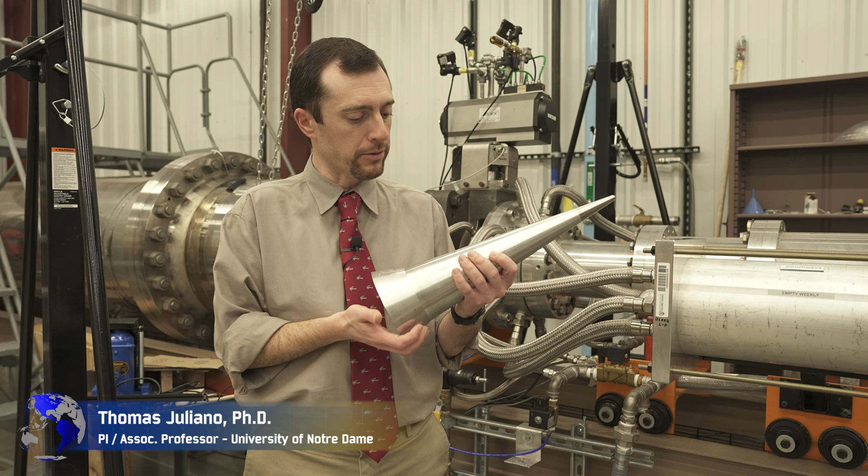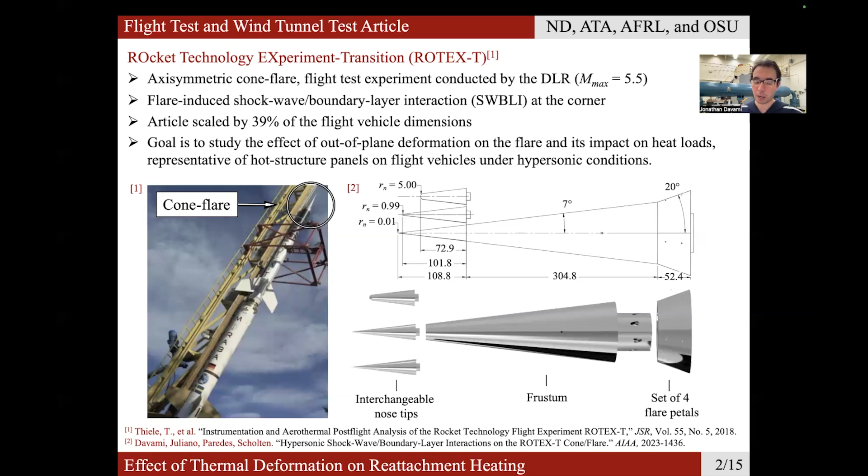First increment of the AFRL Hub project was to first perform computations and compute a thermal deformation field. Then we would superimpose the deformation field onto the flare and fabricate a deformed flare so that we could experiment with it in the Notre Dame Mach 6 Large Quiet Tunnel. We tested the model in the AFOSR-Notre Dame Large Mach 6 Quiet Tunnel.

For the experimental setup and instrumentation, we collected simultaneous surface and off-wall measurements. We collected infrared thermography. We had 4 PCB pressure transducers mounted on the conical forebody to align the model with the free stream flow. For off-wall measurements, we collected simultaneous high-resolution background oriented schlieren and high-speed background oriented schlieren.

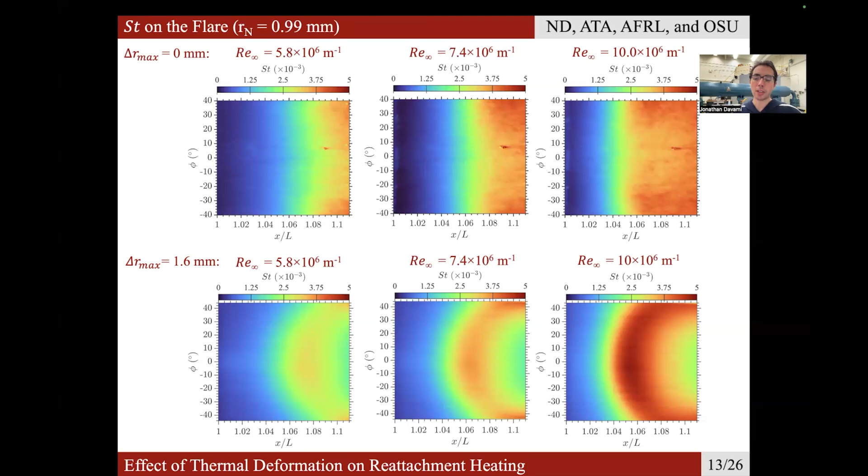This slide here compares heating distributions for the conical flare on the top row and the deformed flare on the bottom row. We can clearly see by comparing the conical heating to the deformed heating that the heating distribution is no longer axisymmetric, and the peak heating magnitude is different as well.

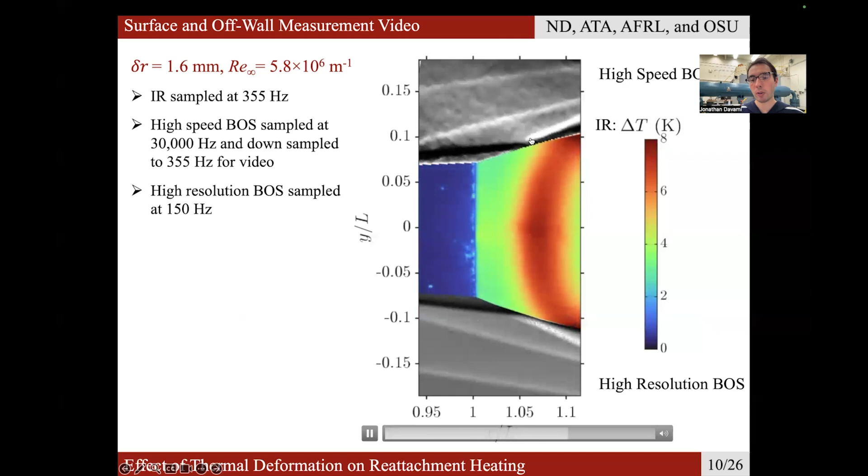This slide here superimposes the off-wall measurements with the surface heating measurements. From the off-wall measurements, we can see the bow shock, we can see the separation shock wave, we can see the reattachment shock wave here at the flare, and most interestingly, we can see where reattachment is. Downstream of that point, we have the higher aerothermodynamic heating characteristic of the shockwave boundary layer interaction. Such deformations have occurred previously on high-speed vehicles such as the Valkyrie seen behind me.

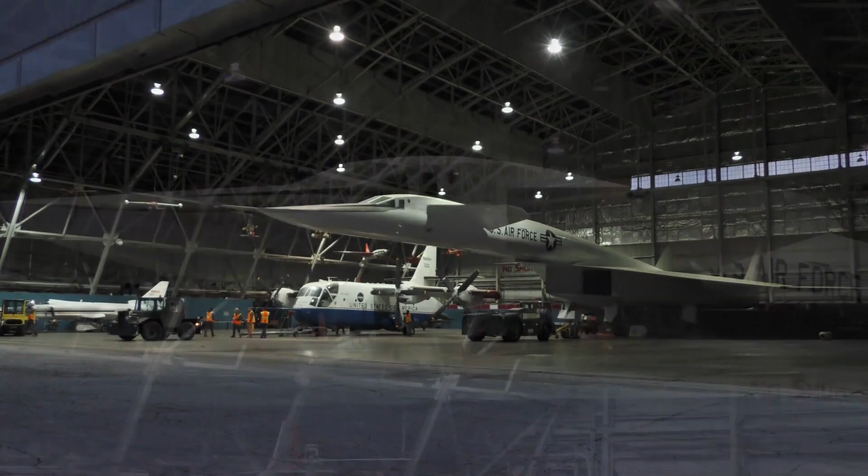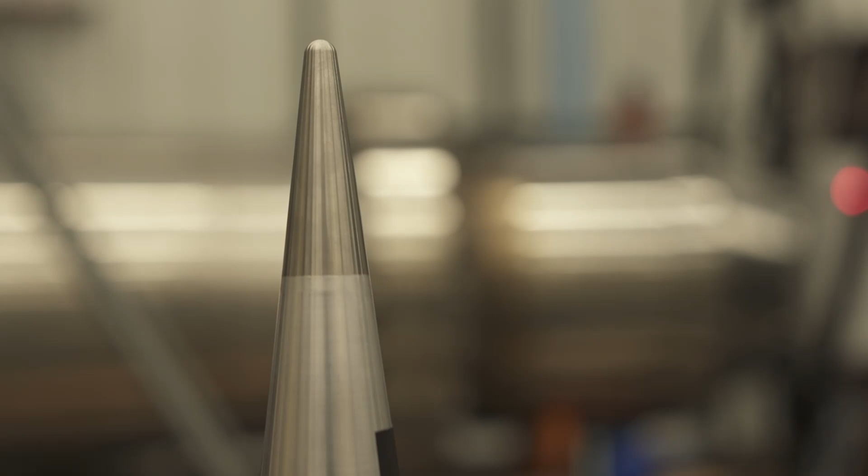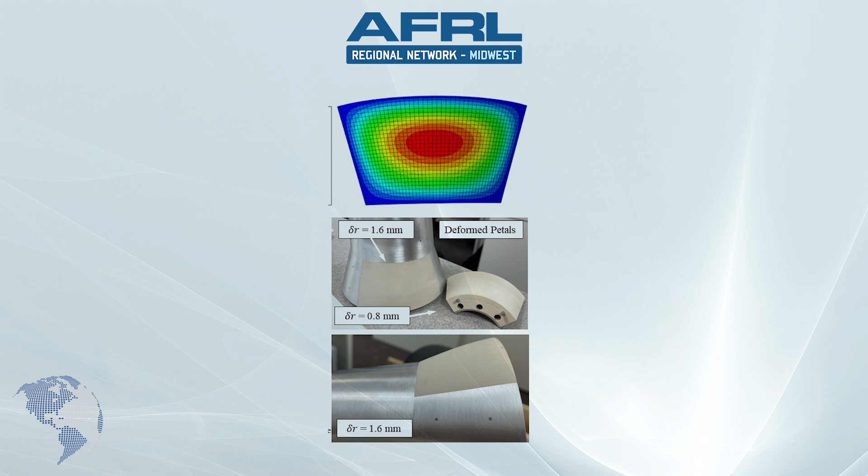As part of this research program, we conducted an experiment at the AFRL Mach 6 Ludwieg tube. This experimental campaign allowed us to use the same ROTEX-T model that was tested at Notre Dame previously to collect data at a facility with a different free stream noise environment. Similar to the tests that were conducted at Notre Dame, IR thermography was taken of the cone and the deformed petal of the flare. This diagnostic allows for measurements of heat flux in the regions that were imaged, letting us directly compare the results from the 2 different facilities.

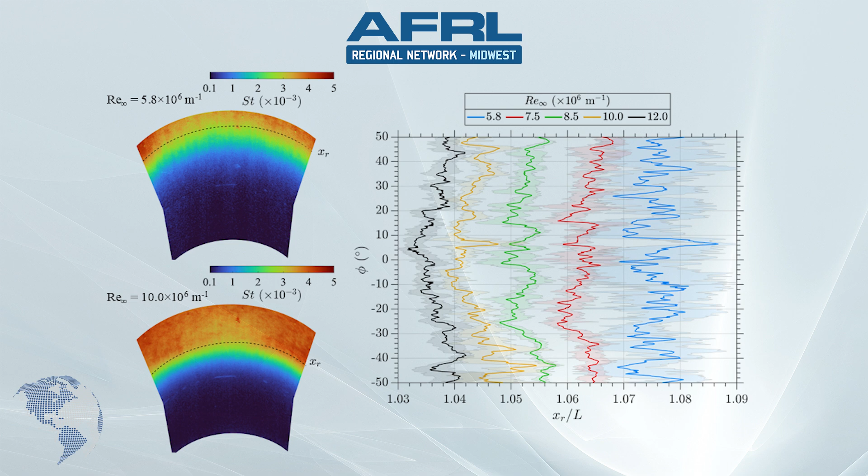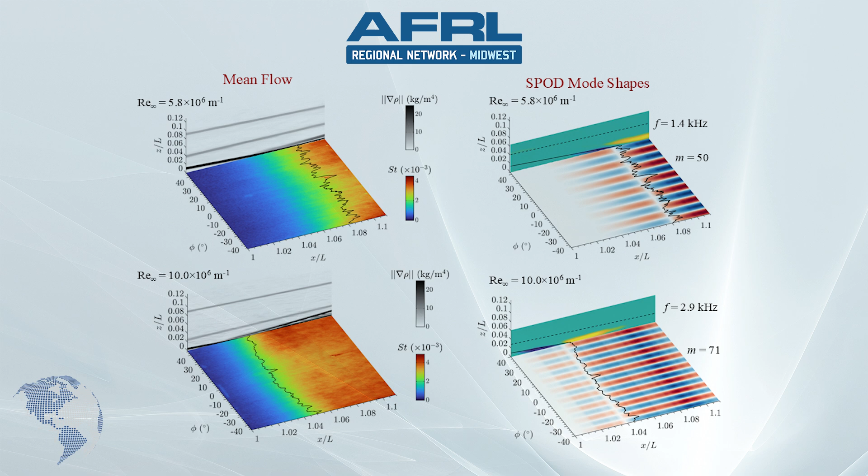In addition to IR thermography, high-speed self-aligned focusing schlieren, or SAFS, was taken at AFRL. It allows for density gradient measurements to be made across a narrow depth of focus, avoiding the large integration distances that occur for traditional Z-type schlieren. However, it was a difficult technique to implement due to the high sensitivity of the diagnostic to vibrations and the challenge in aligning it.

Preliminary results from this experiment support the conclusions made from the Notre Dame tests, showing that the deformation along the flare appears to pin reattachment. SPOD analysis of the schlieren also shows there does not appear to be significant changes in the instabilities present for the different deformation heights.

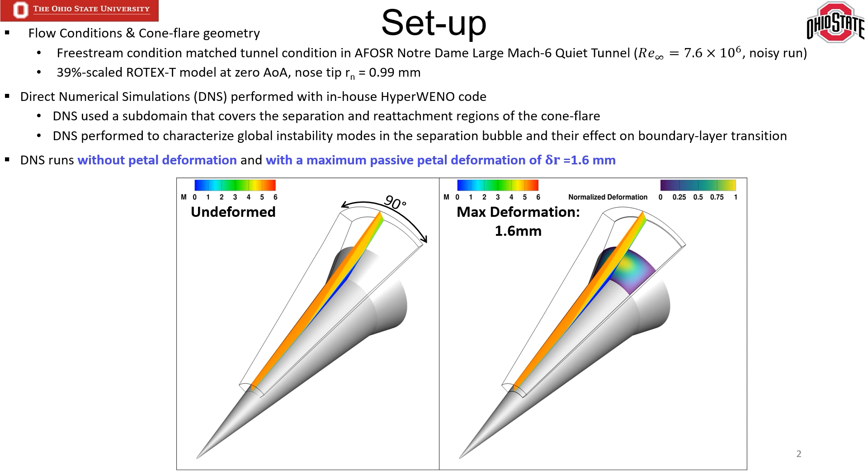Hi, my name is Nolan Little, and I work in the Computational Aerodynamics and Flow Physics Lab here at Ohio State under Dr. Dewan. And we took a computational approach to studying how the surface deformation on the ROTEX-T cone flare affects reattachment heating. So we did 2 direct numerical simulations here, one with an undeformed flare and one with a max deformation of 1.6 millimeters, which corresponds to the more deformed of the 2 petals used in experiments. And both of these domains span a full 90 degrees, which covers a whole petal that would have been used in the experiment.

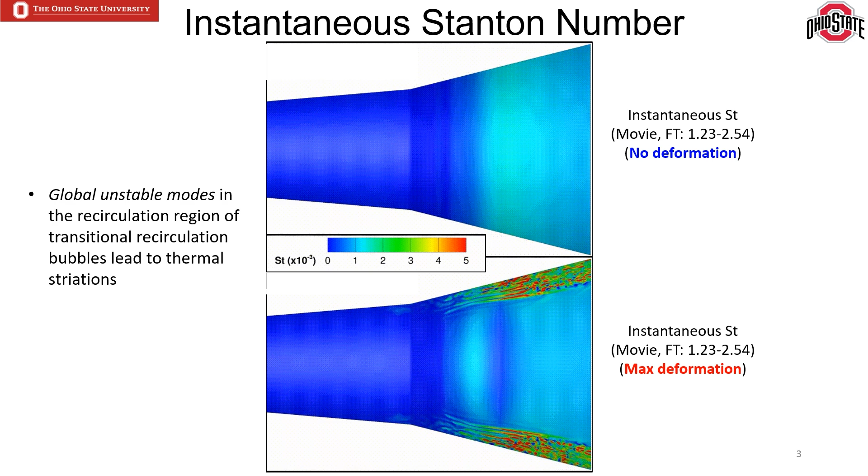Now looking at the instantaneous Stanton, remember we have the undeformed case on the top and the deformed petal on the bottom. Both cases are going to experience some streaking more as time goes on when this global unstable mode develops over the flow and creates more of those red hot spots in the domain. Here we can see a side-by-side of just the flare. We can see as these videos go on that this streaking occurs earlier in the deformed case on the bottom than it does on the top in the non-deformed case.

This earlier streaking seems to point to the global mode growing faster with that deformation. So the deformation makes the flow a little more unstable, which can cause a more turbulent or transitional flow that we might not see in the undeformed case. But the undeformed case does eventually have these streaks grow to numbers that rival that of the deformed case, but overall the deformed case has higher peak heating.

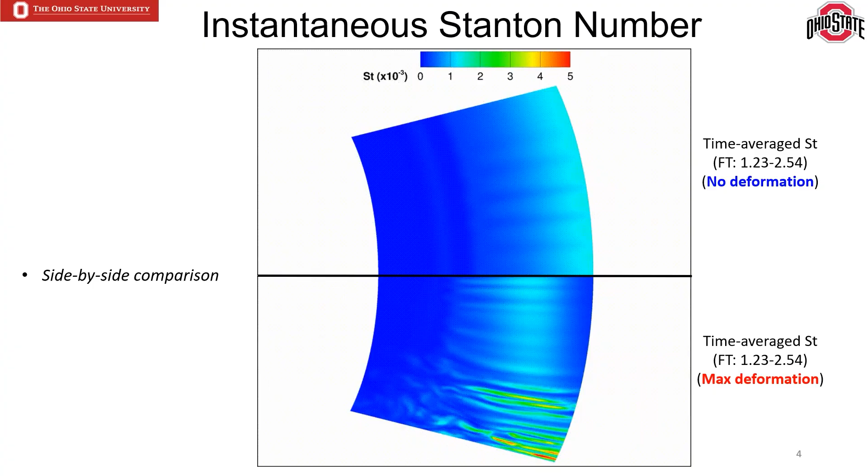So understanding how structural deformation can affect the local loading is crucial to both the design and life prediction of high-speed vehicles. Now, our experiments aim to study aspects of this problem by focusing on how local deformations can affect the peak heating associated with shock boundary layer interaction. An exciting next step of this work is to model our experiments using high-fidelity fluid simulation. This will shed insight into the effects of facility noise levels and allow us to extend our findings to quieter, more flight representative environments.